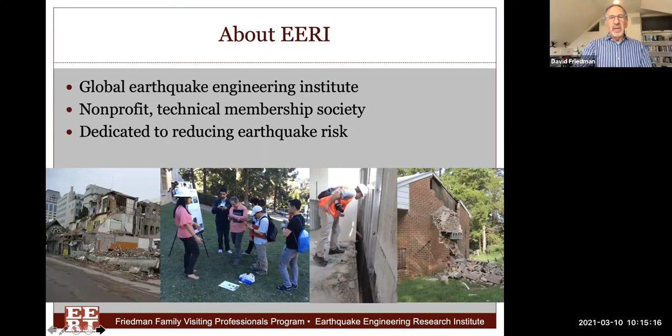Not only as students do I suggest you get involved, but also after you're in school and when you're in practice, even if you're not really focused on earthquake engineering, I think there's a lot you learn about the world, disaster risk mitigation.

One of the things that's particularly unique about EERI is you get to meet a lot of people in a lot of different disciplines associated with disaster engineering and risk planning. Particularly for me, what was so broadening was meeting social scientists, people who were involved with disaster preparedness and post-disaster recovery.

It really is the Learning from Earthquakes program that helped shape my career, and one of the reasons I've loved my career is because I feel like I've been on a continuous learning path, and the education I get constantly from the LFE program is what's so unique.

So I'm going to talk to you a little bit about my career, a little bit about my perspective. I will intersperse a little bit of my timeline. I've had 3 jobs in my entire career: 2 years, 3 years, and 40 years.

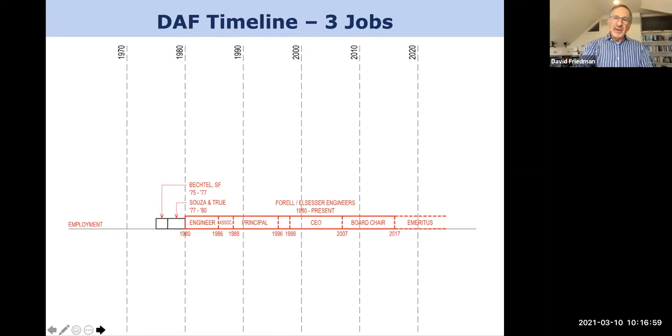I officially just retired from Forell Elsesser at the end of 2020. I still am actively involved on the board of directors of the company, and involved with some other for-profit and nonprofit engagements around earthquake engineering, advocacy, and policy.

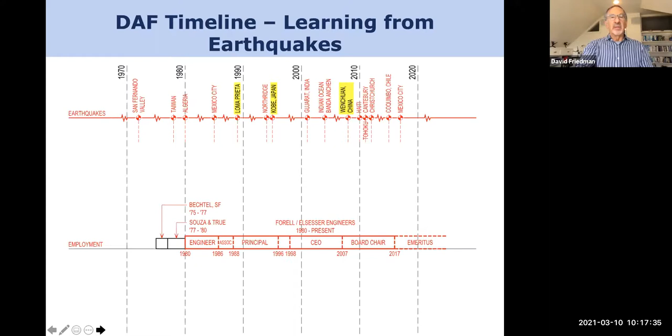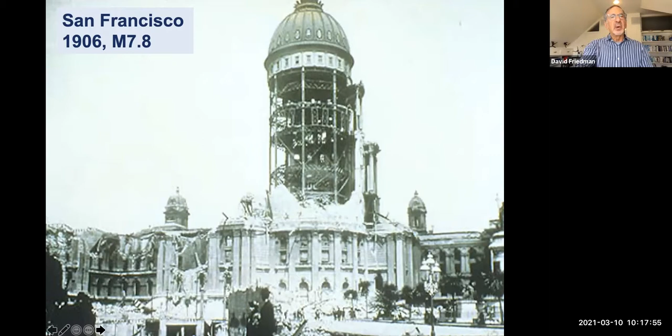But the other earthquakes during the course of my career also had a profound effect for a number of reasons. Now, I wasn't alive for the 1906 earthquake in San Francisco, but later on in my career, I found myself doing the seismic retrofit of the replacement building for this building that had been destroyed in the 1906 earthquake.

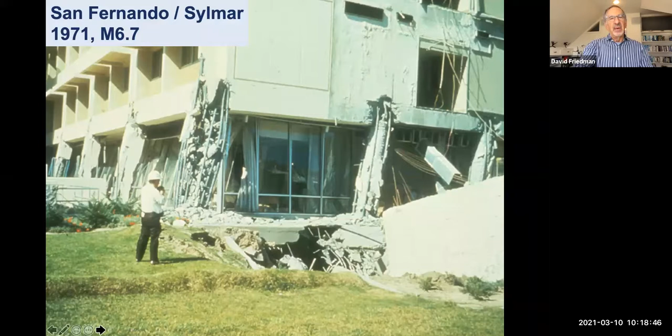Also you'll see that those columns were only standing because of the rebar in them, because the concrete blew out. We learned a lot after that, and the codes changed around the principle of ductility and the idea of transverse reinforcement and concrete resisting elements.

The 1989 earthquake in San Francisco was actually a very small earthquake. It's kind of the bane of my existence as a practicing engineer, because it was a big earthquake for Santa Cruz, which is 100 miles south of San Francisco, but the ground shaking in San Francisco and the duration of ground motion was very short. So lots of people would say, hey, my building survived the big one. And I'd say, really? Your building survived 1906? And they'd say, no, 1989. And it's like, nope, not a big earthquake.

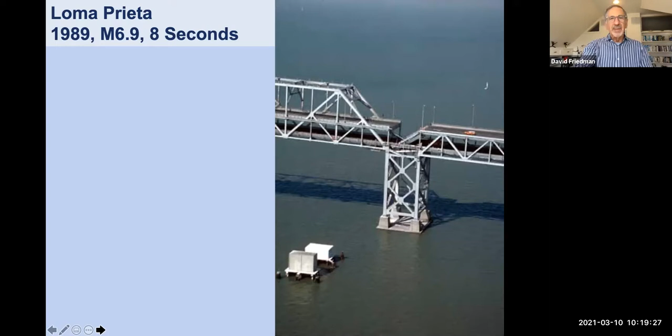Northridge earthquake, Kobe, Japan, I mentioned. This was a game changer earthquake for me because up until this point I had thought about earthquake engineering on the building projects I was doing. This really exposed me to two things. One is earthquakes are regional disasters. They don't just affect a building at a time, they affect a neighborhood, a community, a whole region.

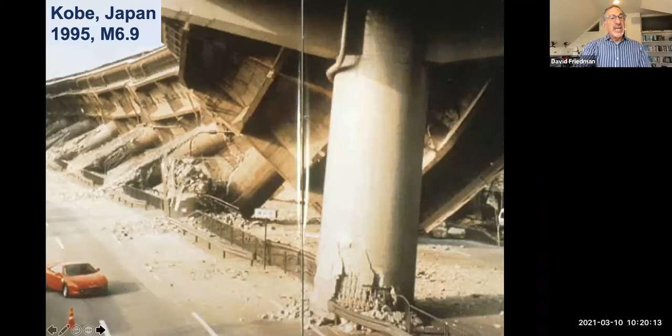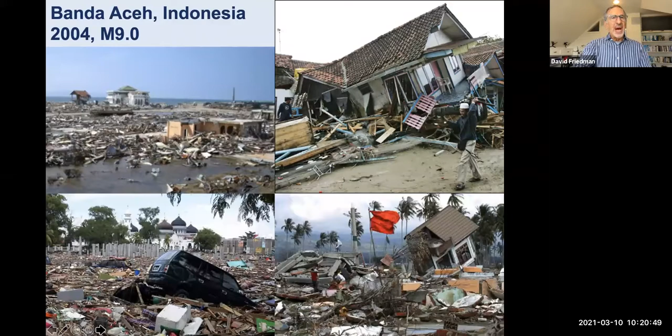Banda Aceh in 2004 really woke the profession up to the hazards of tsunamis. Sure, we knew tsunamis existed in history, but this earthquake and the aftermath tsunami really woke us up. The west coast of the US, I think, started having tsunami warnings. We don't have a huge tsunami risk, but now you go to the beach and you see the tsunami warning signs.

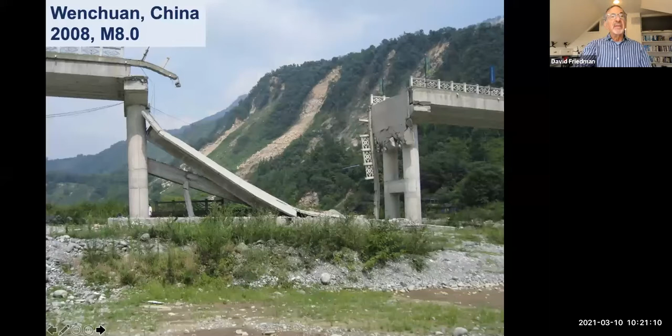Wenchuan, China, I mentioned that I was on the reconnaissance team for this. One of the stories here was earthquake-induced landslides that wiped out entire villages in the rural areas of Wenchuan, China.

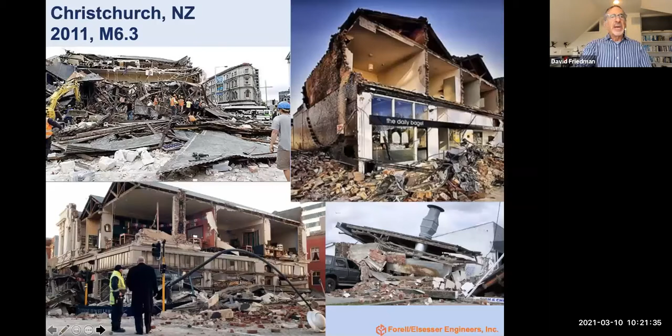Christchurch, New Zealand, there were two earthquakes within four months of one another. The second one was actually a lower magnitude, but it happened right below the city of Christchurch, and it had a profound sense of damage to that city that they're still recovering from.

Tohoku, Japan, this is another very large magnitude earthquake, also a tsunami. You probably know this - this is the one where they had a failure in a nuclear power plant and a radiation leak from that. The other story behind this earthquake was the strong ground motion lasted 2.5 minutes. It's a very long earthquake, felt a long way away in Tokyo.

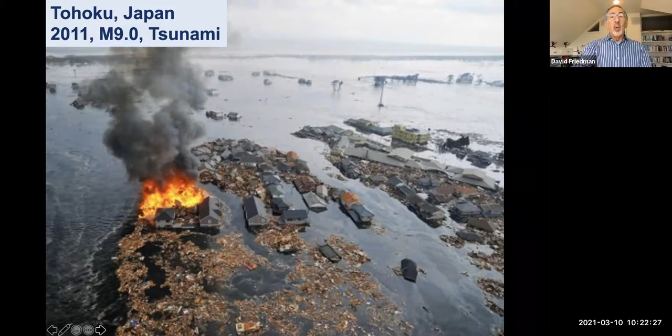So structural engineering - this is my favorite definition of structural engineering. Structural engineering is the art of molding materials we do not entirely understand into shapes we cannot precisely analyze, so as to withstand forces we cannot really assess, in such a way that the community at large has no reason to suspect the extent of our ignorance. Now, I don't mean to really suggest that we're ignorant or not bright, but we have to accept that there's a lot of uncertainty in what we do.

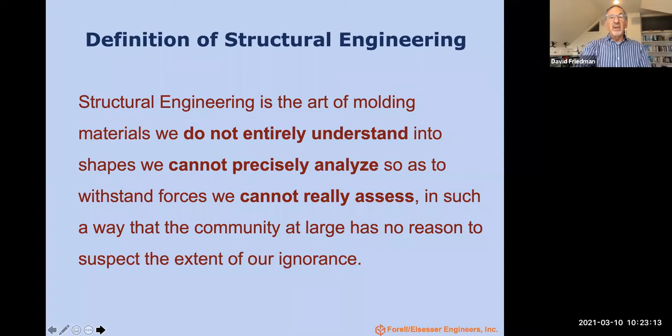We don't know when the earthquake is going to happen. We don't know how big it's going to be. We don't know how long it's going to last for. But we're talking to clients, and we have to communicate what it is we can and cannot promise.

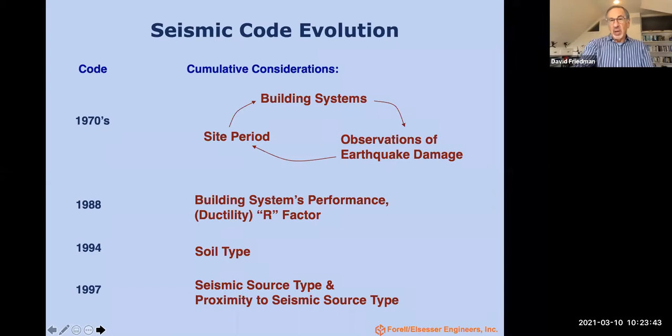Some of the issues facing engineering today: the codes. As I mentioned, we chase earthquakes because we learn things, and then we change the codes in response. When I first started practicing earthquake engineering, structural engineering, the code provisions for earthquakes were maybe 10 pages long. Now it's 100 pages long, and they're better. But still, you've got to think your way through the code because the code is based upon a life safety mandate.

So what does that mean, and how do we translate that? It means that we design buildings so people can safely get out of them. It means nothing about their ability to get back in them. We accept damage in buildings. We know that to dissipate the energy of the earthquake, buildings have to move, because that's how they dissipate the energy of the earthquake.

So a code complying building is this building - it's moderate disruption. But a lot of people, the public generally, thinks that when the building has been engineered by a licensed engineer, they're getting an earthquake-proof building. They're getting one of these.

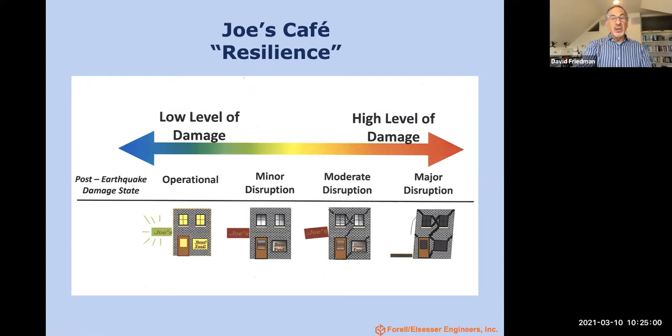Well, there's no such thing as earthquake proof. We do have the technology to deliver high performance engineering, but that's not what the code mandates. And I would say a lot of the architects that I've worked with in my career really don't understand that, so it's something we need to communicate to them.

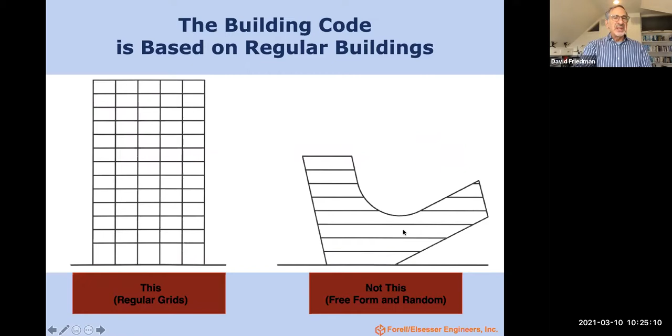The building code is also based upon kind of regular buildings. It really doesn't translate very well for the types of modern architecture that architects want to produce. And our job is—these buildings are not deformed shapes of buildings. This is the architecture, and this is what we have to find regular, rational engineering design solutions to.

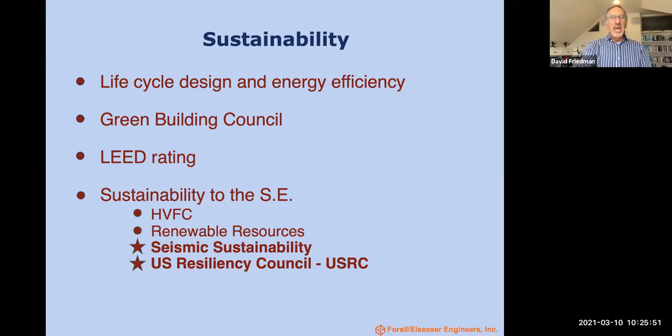Sustainability, in the latter part of my career, has become kind of a holy grail of what we're trying to preach. The problem with sustainability was it was more about energy sustainability and kind of missed the whole notion of seismic sustainability.

We also, given the fact that there's so much uncertainty, we engineers do get a bad rap where we spend so much time in technical classes. Maybe we don't have as much experience becoming good writers and good speakers, but it's really important, and it's even critically important for us because we have to communicate complex technical things to generally a lay public or a non-technical audience. So it's part of the stuff we have to work at as we go into practice and explain to people what we're doing.

Now, my favorite part is to talk about some of the projects that I've worked on. So here my timeline highlights some of the projects I mentioned.

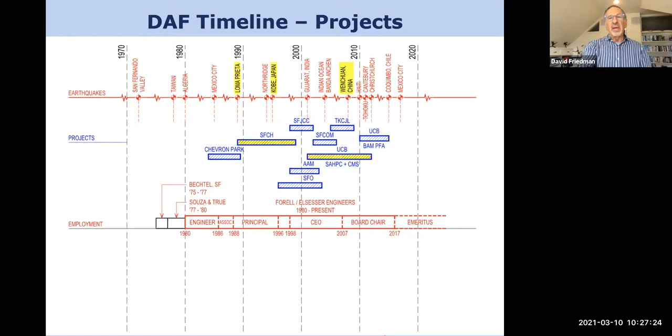For the most part, my engineering career was spent working on seismic retrofits of historic structures. I'm going to talk to you about two of those projects: one is the base isolation retrofit of San Francisco City Hall, and the other is the seismic safety corrections of the American football stadium that sits on top of an active earthquake fault.

The San Francisco City Hall project, as I mentioned, was an early use of base isolation. I'm not sure I could have assumed that you all know what base isolation is, so I'm going to give you a very quick introductory primer on it.

So what are base isolators? Base isolators are these little widgets. There's two basic types. The two on top are elastomeric rubber isolators. They were used before as bridge bearings, but we started thinking of them for anti-seismic design.

The elastomeric rubber isolators are really a layered birthday cake, if you will, of layers of rubber and steel, vulcanized, kind of baked together, so they act as one monolithic product. There's also the lead core rubber, where a lead core is put in the middle, which has a dampening effect and a restoring effect.

The other principal kind of isolator is what we call a friction pendulum, shown below. That's a concave steel surface and a ball bearing rubbing up against it, and it's moving—its top plate is moving relative to the bottom.

The elastomeric isolators are about 24 inches tall. They can be up to 3 feet in diameter. The friction pendulums can range in size from 3 feet square to 6 feet square.

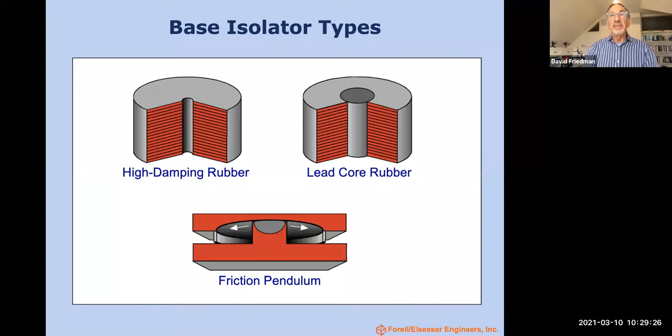There's two basic reasons why we base isolate buildings, why it's the best anti-seismic system that we have in our toolkit. The first reason is interstory drift. A fixed base building—and a fixed base building is anything other than a base isolated building, like a braced frame building or a shear wall building—moves from floor to floor in an earthquake, and we call that interstory drift. That interstory drift creates damage.

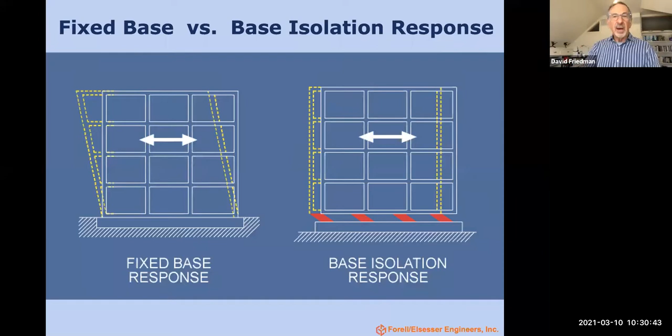That damage, again, is what we expect to happen, because that's how the energy of the earthquake is dissipated and resisted. In a base isolated building, most of that horizontal deformation happens in the isolators, and so it means we get to design the superstructure with far less interstory drift. It almost moves monolithically. So that's one reason why we base isolate buildings.

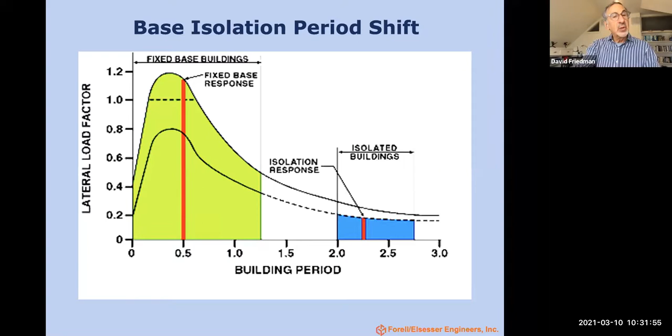So it means we have to design the superstructure for 1.1 G. But with base isolated buildings, you get a period shift, because the fundamental period of vibration of an isolator is between 2 and 3 seconds. So if you read across, instead of designing the building for 1.1 G, we're designing it for 0.2 G, an 80% reduction in lateral forces. So those are the two principal reasons why we like seismic isolation.

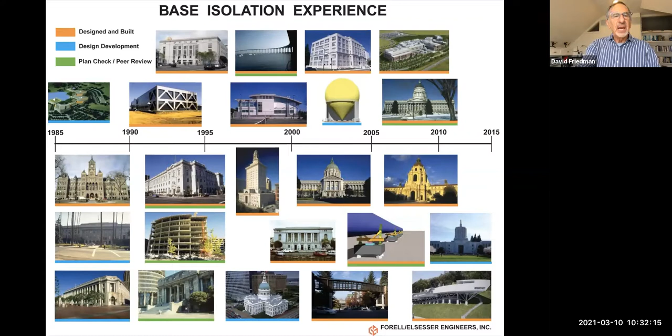One of the first projects we did was the City and County Building in Salt Lake City. After we finished that, the 1989 earthquake happened, and that's when we started working on San Francisco City Hall. This is a photo of the new San Francisco City Hall, built in 1915 after the previous City Hall was destroyed. It's 2 city blocks, 307 feet tall to the top of the lantern on the dome. This is the building that was destroyed in 1906.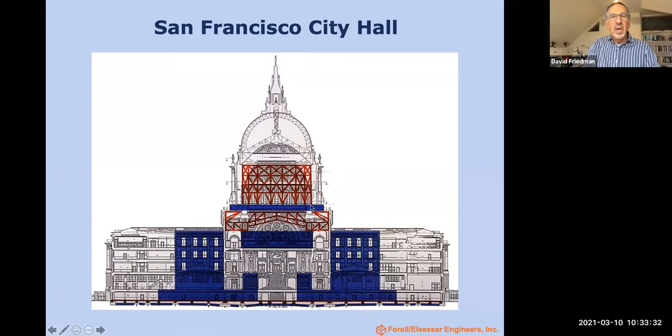We also had to put in a lot of steel bracing and transfer mechanisms to transfer the load down, because this stiffening was still needed to protect the brittle dome of the building. If I had another 2 hours, I'd love to tell you all about that part of the project, but I'm going to focus just on the base isolation.

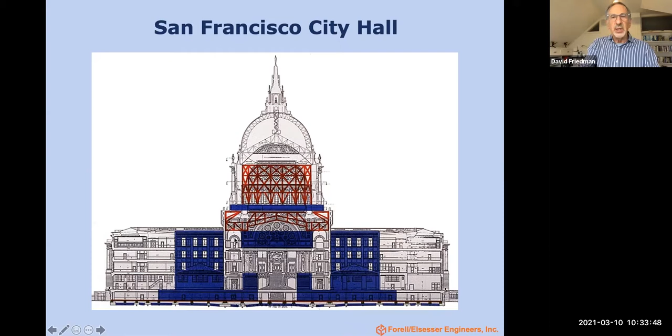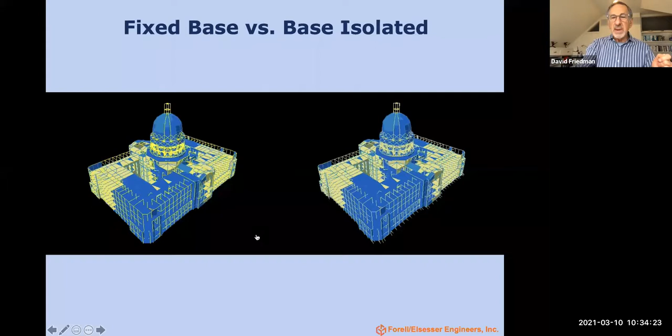This is the best part of my presentation, and I'll show this again. What you're seeing on the left side is a fixed base retrofit of City Hall, and on the right side is the base isolated retrofit. We used this to explain to the client what we were doing. What you're seeing is a real earthquake time history being input into our model. I'm going to show this again, so keep your eye on it.

Okay, I have just the left one going. This is the fixed base. Look how much the dome is moving. Look how much the corner pediments and entry pediments are moving. We would have had to do a lot more work, and in fact we would have had to rebuild the dome if we went with a fixed base solution.

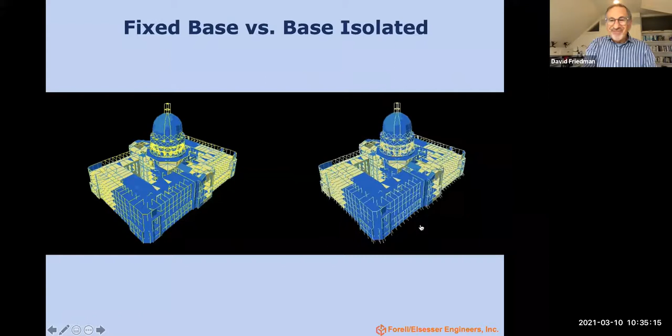Now if you look at the right hand side, you'll see it takes a moment for those base isolators to get activated. But keep your eye and compare - look how little the dome is moving. Again, that's interstory drift. The pediments aren't moving as much, the corners of the building aren't moving as much. So that's why we use base isolation. This animation is where we got the client to say, oh, now I understand what you're doing.

The real fun and the real trick was, how do you get the isolators into the building? I have a couple of construction slides I think you'll enjoy seeing. The first thing we did was a complete demolition inside the ground floor, excavated around the existing foundations, put in pretty much a mat foundation system - you can see the reinforcing steel going in. All of the concrete encasement of the steel columns were chipped away.

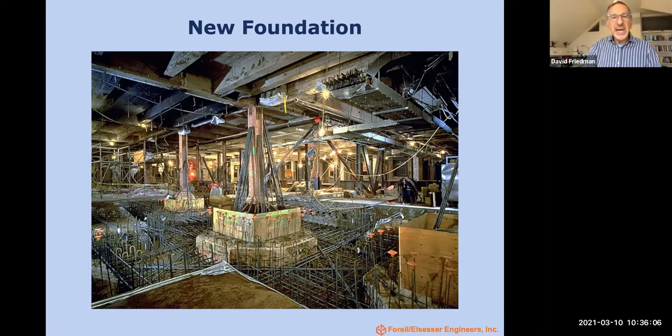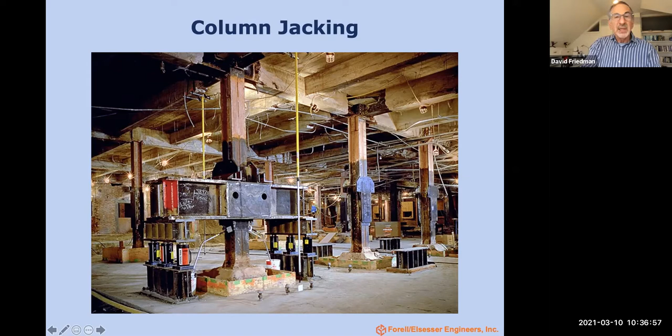Once we have clamped the column, and we have these gauges on the lower part of the column to see that, because of the stiffness of this armature, the load is bypassing it, then we can come in and cut the columns off. Once cut, you can see the cut column here - we can go in, chip out the existing foundation, complete the rest of the foundation, put in these base plates for the base isolators, and you can see the little anchor bolt templates that are there.

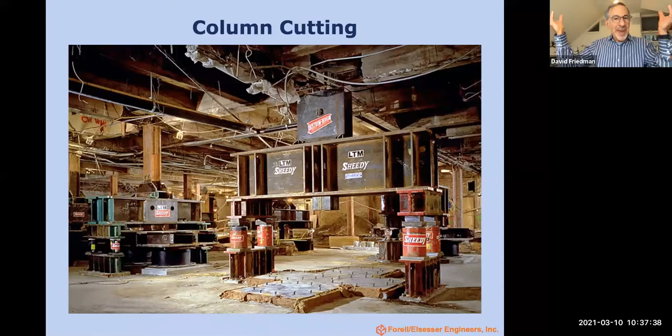On the left-hand side, you can see the isolators have been brought in. This particular shot is of 2 of the 5 columns that supported that very heavy dome and drum structure, so we actually have 4 isolators under these. This now shows the isolators in.

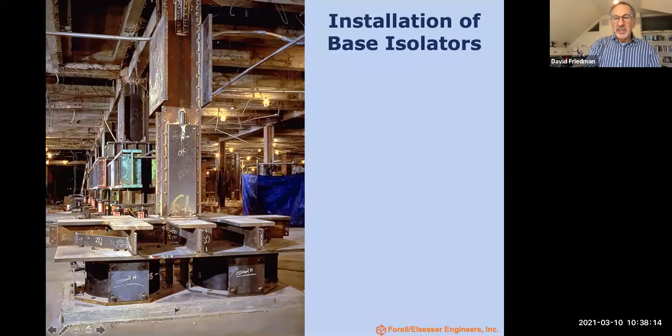They're actually locked into place because we did not want these isolators moving until the entire building project was done. We bring in these very stiff ground floor girders to reattach the column to, and this is part of the new floor system. So everything below this floor is in the isolator plane, and these isolators were designed to move as much as 3 inches laterally.

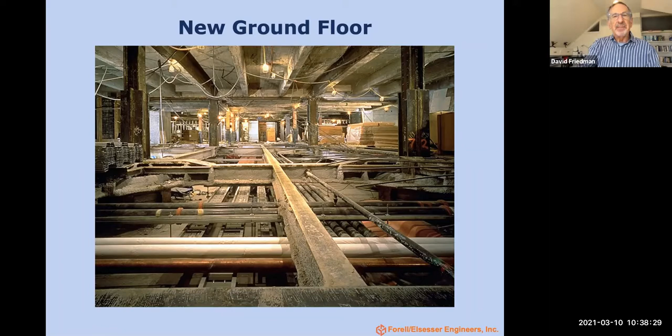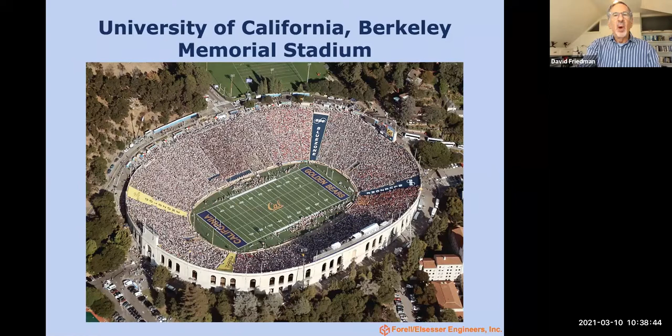I also want to tell you a little bit about this other unique project, the American football stadium on the University of California, Berkeley campus. What's unique about this building, this historic building built in 1922 in 9 months for a cost of $1 million US, is that it sits on top of the very active Hayward Fault.

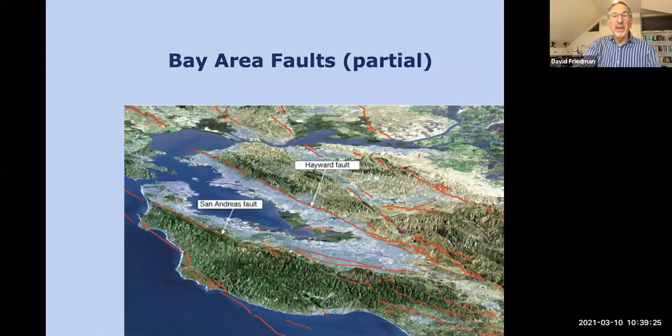This is a map of the faults that exist in San Francisco. The San Andreas Fault is the fault that went off in the 1906 earthquake. The fault we are more worried about going off is the Hayward Fault, because it's been 150 years since we've had an earthquake on that fault.

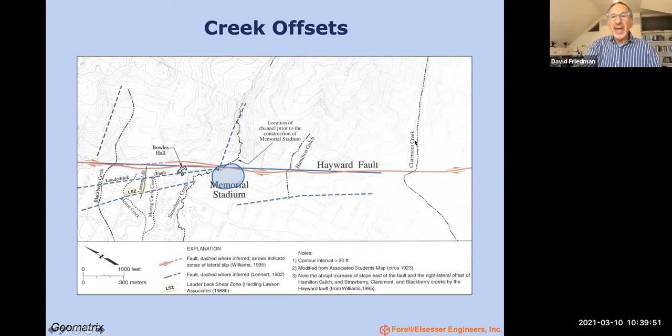Faults creep over time, and we can tell a little bit about where the faulting is actually occurring. You can also see some of the creeks flowing east to west and how they meandered a little bit. That's because of faulting.

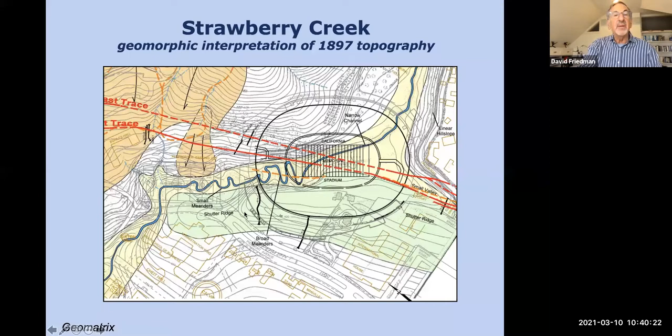Here's a closer up geomorphic representation of the fault that runs right through the stadium. You also see in green what we call this shutter ridge, and look at the way Strawberry Creek, this underground creek, has completely been diverted. That is because of the shutter ridge and the creep in the fault that has happened over geologic time.

We did a lot of trenching to begin to help us understand where the fault was, but we knew in this representation the fault was pretty much running north-south through the stadium.

We knew that the issue was not as much ground shaking. The issue of trying to retrofit a building on top of an active fault is the fault rupture and displacement. Geotechnical engineers gave us displacement estimates as much as 6 feet horizontally, 1 to 2 feet vertically. That could be the offset.

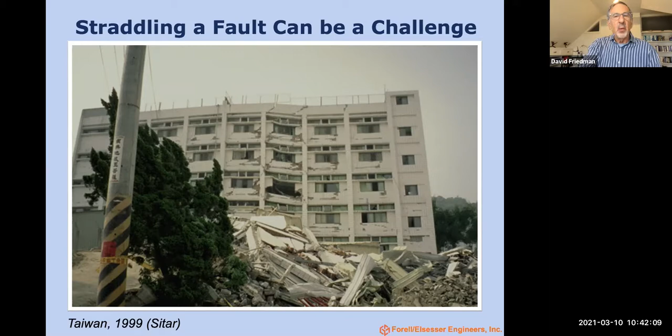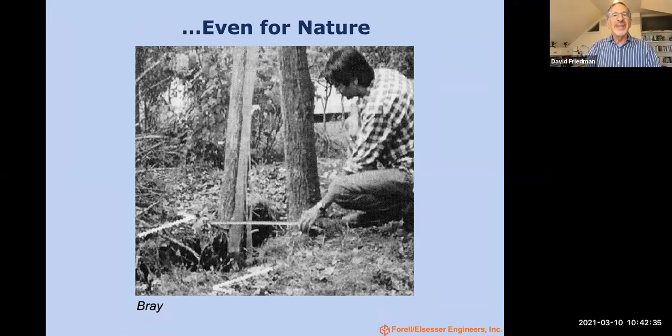This was another slide from a professor at UC Berkeley of a rupture in a tree trunk. We think the reason for this was because, think of it as having a deep foundation system, the root structure of the tree locked it into the rupture, and that's why the tree trunk split vertically.

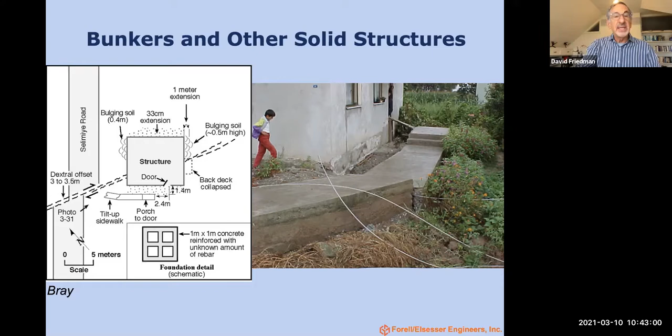This was one last smaller example of a small but very stiff structure that was on a level mat foundation. What happened to this structure with the vertical and lateral displacement is it simply twisted a little bit and tilted a little bit, and that's it.

So that told us something about what our solution was. We were going to carve out and separate the stadium and create these fault rupture blocks, and we would create a seismic joint. Usually in big buildings we put seismic joints in, but those seismic joints just go through the superstructure. In this case, we wanted it to go through the foundation as well.

We were going to put the fault rupture block on a very thick, rigid mat slab. We would design the fault rupture block as a structure of its own, sitting on top of this, so that in the event of an earthquake, this block would simply rotate or tilt a little bit.

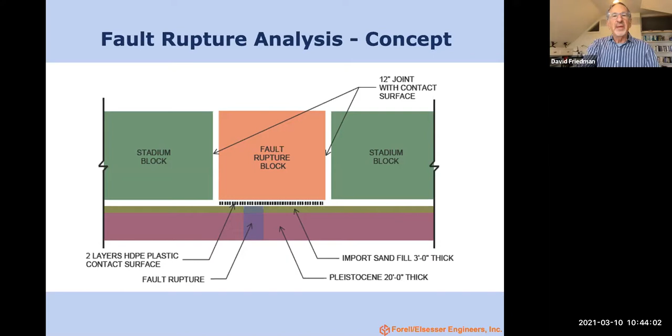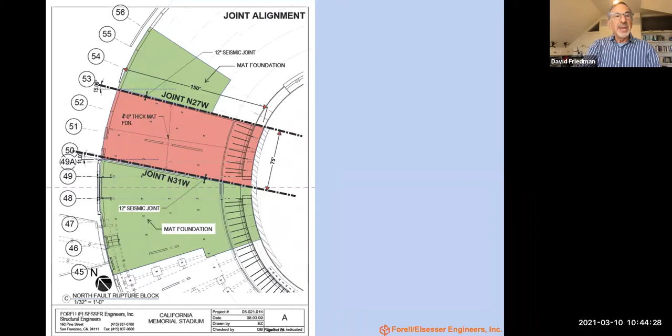But life safety is our mandate, and we felt this was a life safety solution. So we created, in red, one of these blocks on the north side and one on the south side. This is kind of a blow-up detail. The geotechnical engineers actually gave us the angles and probabilities of where the fault was likely to occur.

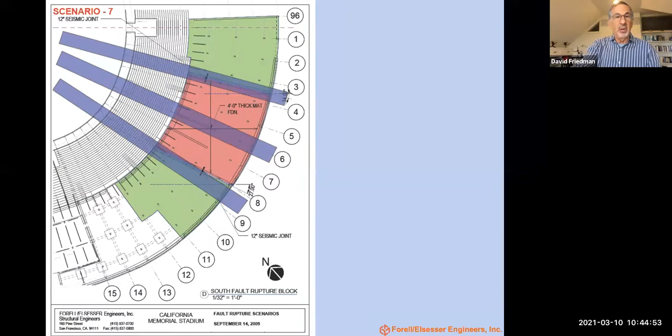Nonetheless, we created a block zone. We then did something like 36 parametric studies where we experimented with what if the fault didn't rupture where they thought it was. This is a case where we said, what if it diffused itself and ruptured in three parallel locations? And maybe if they were wrong and it happened outside the zone of our block, what would happen?

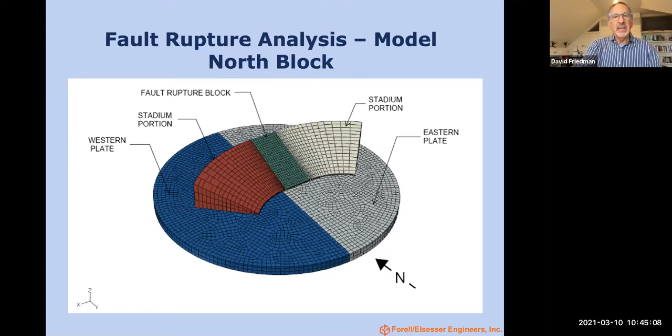We did what we call a finite element analysis modeling of it. We used a software called Abaqus. We actually did a physical model as well.

We found that the physical model—it was actually our peer reviewer and the seismic review committee of professors on campus who suggested that we do a physical model. They said, and we asked them, sure, that's a good idea, how would you suggest we do it? And they said, I don't know, you're the engineers of record, you try, you figure it out. So we did. We came up with a kind of crude physical model, and we just kind of order-of-magnitude tested it against our analytical models.

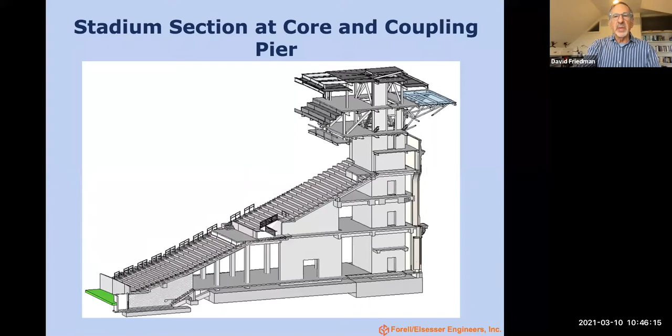It correlated very well. I'm going to quickly go through one other aspect of the project, because we spent so much time on the fault rupture we forgot about the west bowl. We found that we had a problem because we had this big press box that was 330 feet long.

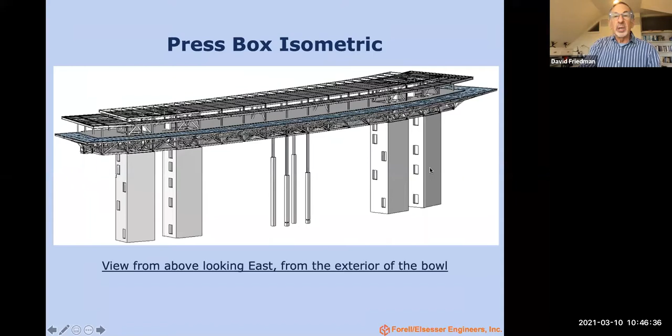It had a lateral force span of like 200 feet, supported on these concrete core structures. If you took a transverse cross section, we had these periodic radial walls, but we still had this triangulated, very stiff structure laterally, and then this structure that's kind of an inverted pendulum.

We found that our solution—because we've retrofitted a lot of non-ductile concrete structures—this time we kept tying the two elements together. They just wanted to move differently from one another because their stiffnesses were so different.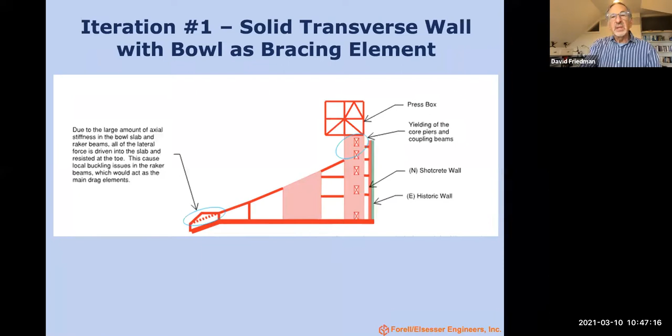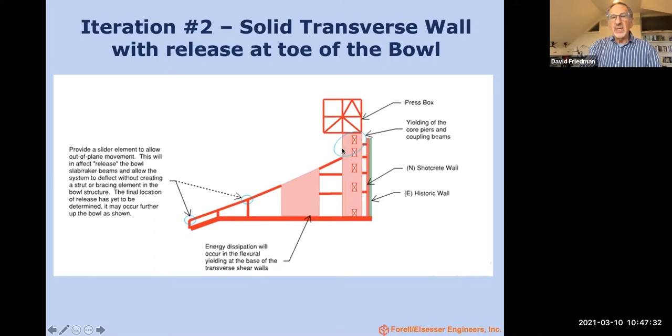So we started doing some things like relieving some of the stresses in these raker beams. We tried to put some more ductility in the yielding at the top of these piers. That didn't seem to be enough.

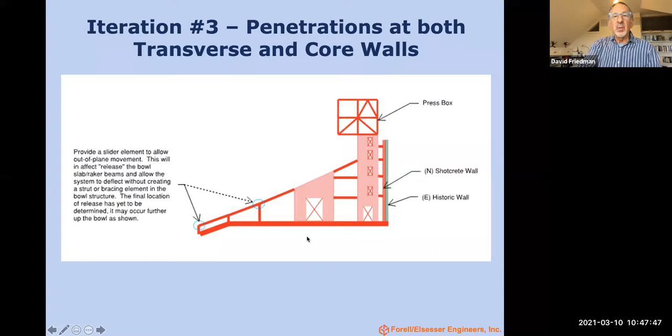We went to the architects for the first time in my career. We had the idea of putting an opening in a shear wall, but that was only so that we could ductily reinforce these piers. That still didn't quite get us where we needed to go.

This is one of the things I've found in my career: sometimes you get locked into your solution, and sometimes you have to step back. And finally, what we did here is he said, why are we fighting this? Why don't we let the two structures behave independently?

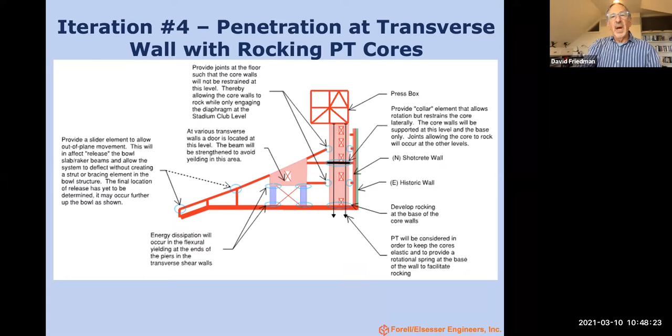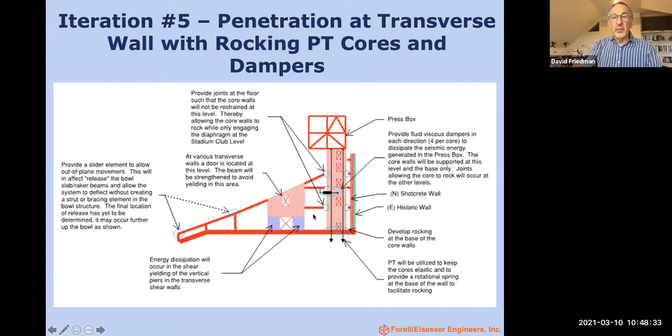So we carved them free from one another. We put a collar around them. We vertically post-tensioned the piers, and then we even introduced fluid viscous dampers to help control the differential motion between the two. We did a lot of analysis on this as well.

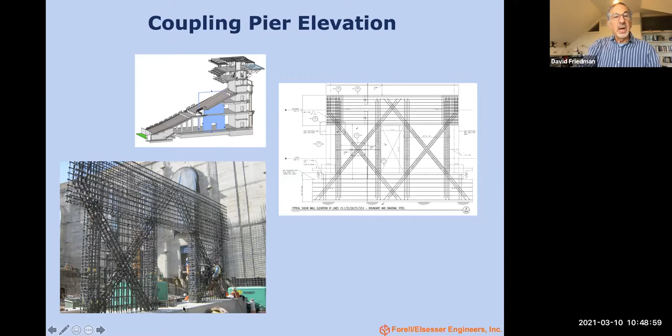I very quickly want to show you some construction photos. These are the radial shear walls. You may not be used to this in your country, but this is the amount of reinforcing we put into ductily reinforced concrete shear walls in earthquake country.

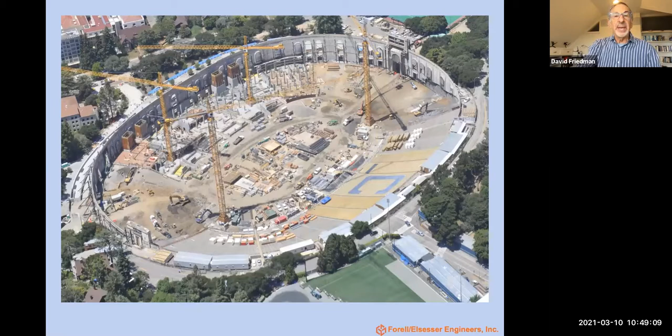The construction had to be done in a very quick 20 months. Every piece of material had to come in and out of this one arch at the north end of the stadium, and we had to think about that in terms of some of our detailing.

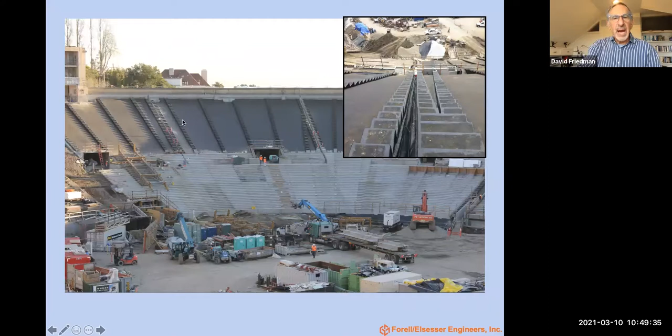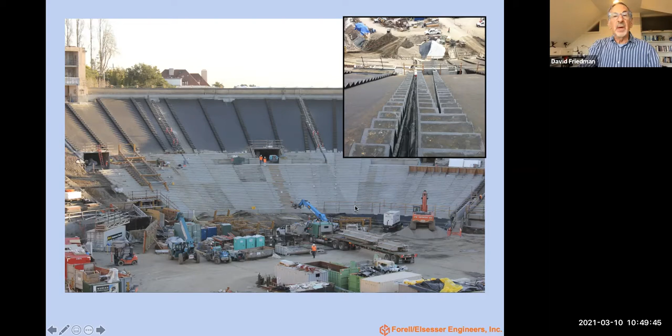This shows the west bowl of the stadium going in. This is the fault rupture block, almost finished construction. Here's the seismic joint, which was very different from the radial grid of the stadium. And this was the first tier of the press box.

This was interesting because it was like a space frame. It had been fabricated at a fabricator's in the Sacramento Valley, erected there in five sections, then unbolted, put on flatbed trucks, trucked into the stadium, and then reassembled to make sure it all still fit.

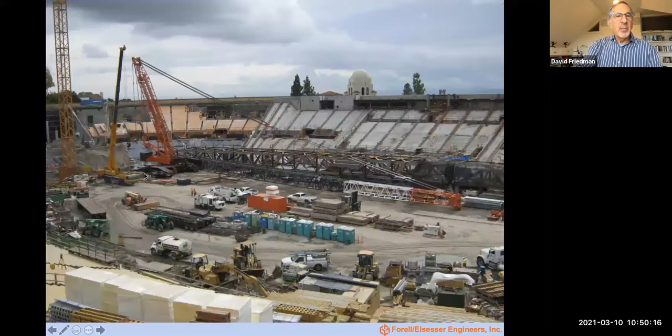And then they brought in this little yellow crane to erect this crane, which also arrived on like 73 flatbed trucks and had to be assembled there.

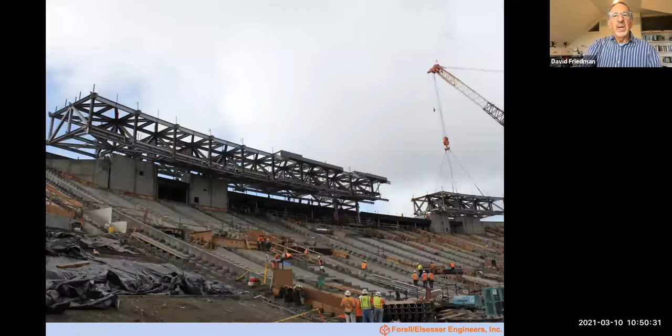And the whole purpose of this crane was to lift up these 5 sections of the press box, where we actually detailed it.

Normally something that is spanning longitudinally, you design it to do that, but here we designed it in these 5 transverse sections so that it could be picked up and then laced together afterwards, and then they built the second tier on top.

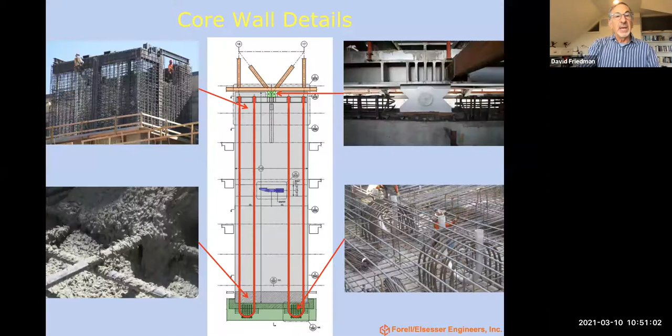You know, I think you learn a lot from joining professional associations, but I'm also kind of a social justice guy trapped in an engineer's body, and I got involved in some community and civic organizations.

And now at the end of my career, I'm spending a lot of time with some nonprofits, one called Build Change, the other called Geohazards International.

They do seismic risk mitigation in the developing world. So, I think that's where I like spending my time.

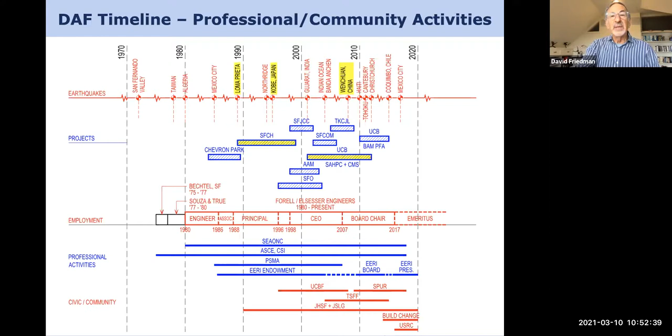I will conclude with saying I think you have great careers ahead of you, and I hope you enjoy your profession as much as I did. And now I've gone a little bit over, but I'd love to answer your questions.